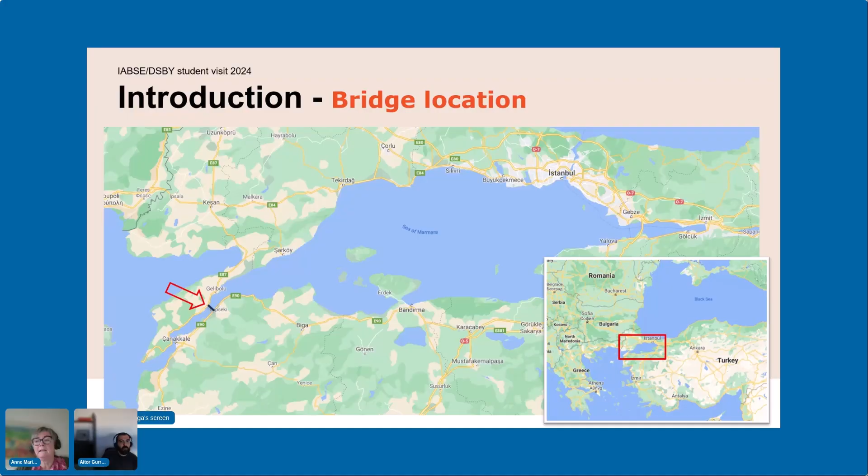More than 40,000 ships pass every year, and in addition to that, the bridge is furthermore located in an area with high seismic activity and with large wind impacts from the Aegean Sea. So there have been a lot of challenges in the design. Next, please.

Here are some numbers for the bridge. The bridge has a main span of 2,023 meters, which is not only the longest span in the world, but also the 100 years anniversary for the Republic of Turkey. There is a lot of symbolism in the bridge, as it is the location for a battle that took place in the First World War in the year of 1915, which also is a part of the name of the bridge.

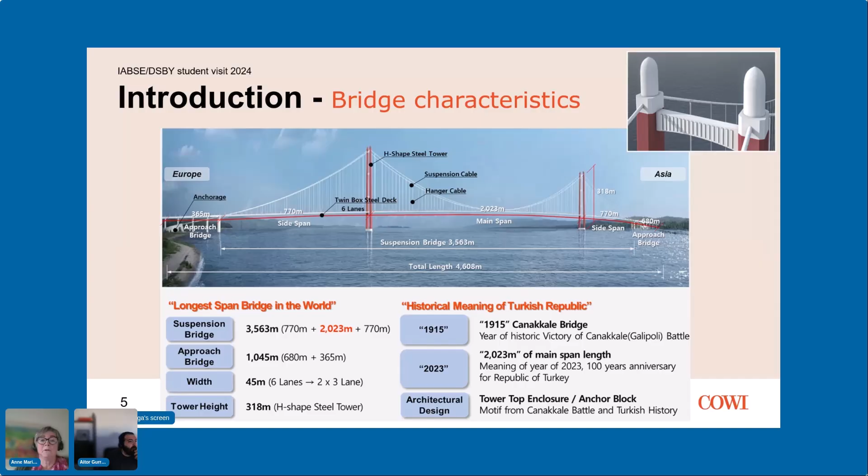The towers are 318 meters high, which also is a date for the victorious battle that was on the 18th of March. The main cable, the suspension cable, has a diameter of 870 millimeters with 144 strands, and the highest point of the deck is at level 86 meters. Next, please.

Our client was the consortium DLSY, which consists of contractors from both Turkey and South Korea. And our scope was the detailed design together with a consultant from South Korea called PEC. There were no requirements for 3D models or any other information rather than drawings and bar bending schedules. The drawings were supposed to be submitted in PDF and AutoCAD format. For the structures we did in Tekla, they got IFC files per request, but it was for information only.

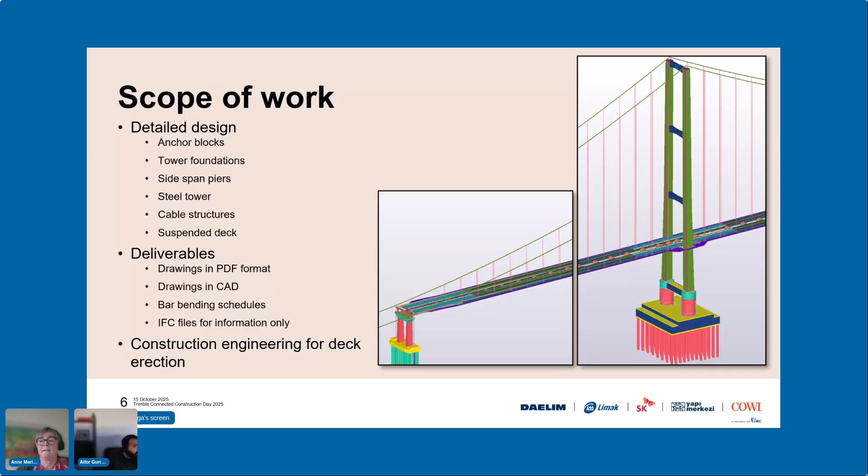After the design was completed, COWI got the contract for construction engineering for the deck erection, and it was a huge benefit that we had the 3D models. Here you can see the different parts we did in Tekla. And as it was one of the first major bridge projects we did in Tekla, we didn't use Tekla for all structures. We did the concrete structures, the anchor block, the sidespan pier, and the tower foundation with full reinforcement as it was necessary for creation of the bar bending schedules.

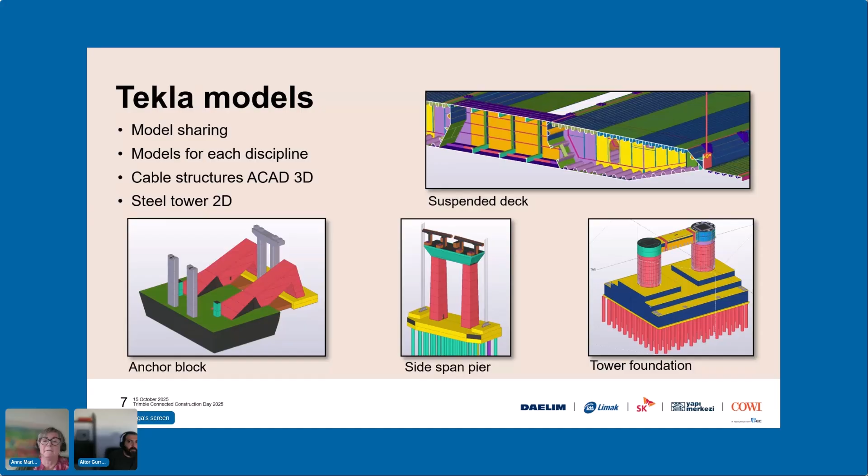And then we did the suspended deck, which you can see on the top, in Tekla, and it is a steel structure. We started out having everything in one model in Tekla Model Sharing, but we decided after some months to split the model into models for each discipline. The reason was that the model became quite heavy, and we were around 20 modelers, and it was a lot of reading in and writing out, especially around submissions. And furthermore, the risk if something went wrong in the model was minimized with having different models. So, next, please.

Now, we will focus most on the suspended deck, as the way we modeled the deck has led to a development project that Aitor will talk about later. The bridge deck is a twin box girder with a cross girder in between, and is 45 meters wide and has 6 traffic lanes. The height of the deck is 3.5 meters.

Everyone might not know exactly how a suspended deck looks, but the deck is divided into segments, typically corresponding to the distance between the hangers, and you can see what is selected in the image. That is a segment on one of the boxes.

The segments are constructed in fabrication yards and then transported to site and erected into place. A deck segment consists of an outer box, including the stiffeners, the longitudinal steel, transverse diaphragms, and a hanger anchorage, and between the two boxes, the cross girder.

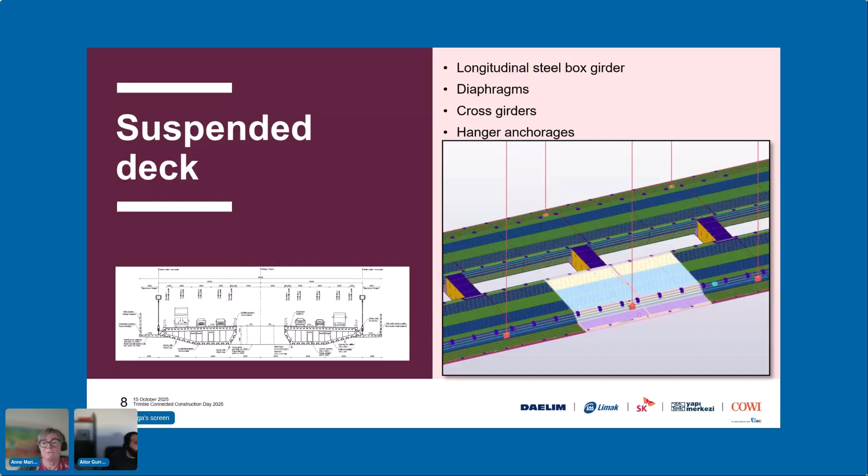So there were some considerations how to do the modeling, and the developer came up with the idea of having dummy beams to control the geometry and setting out. An object based on a parametric profile that represents the geometry of a deck segment, both in transverse and longitudinal direction. Those dummy beams were main parts used to insert the actual objects.

The segments are straight, 24 meters long, and got inserted into the model in the curvature that defines the longitudinal profile of the bridge by start and end coordinates exported from our internal analysis software, IBDAS. This approach has been developed further with a live link between IBDAS and Tekla, so IBDAS inserts the dummy beams.

Throughout the life of the model, the dummy beams continue to be useful, as each face and corner could be used as reference for setting out for further modeling. And you can see the 2D picture with WP1 and WP2, that there are some working points, and that is what is related to the dummy beam.

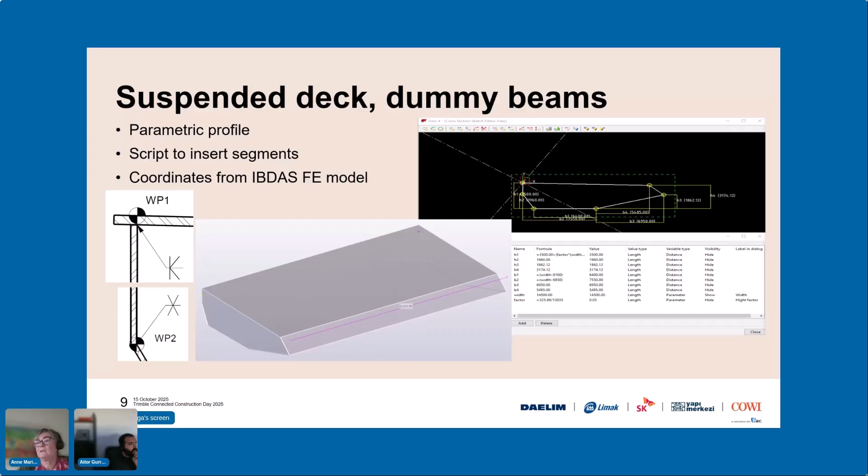Yeah, thank you, Aitor.

All the main parts were prepared as custom components and inserted by utilizing the dummy beams. And you can see it in the video how that is happening by picking the object. This is now a more automated process with Grasshopper scripts and inserted as Grasshopper components, which I also will talk about later. It was taking into account all parameters that varied, so it was possible to update the parts individually.

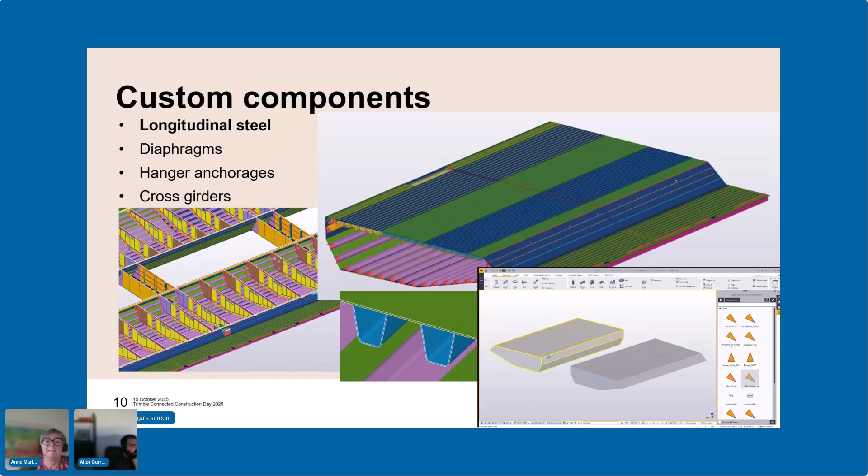Next, please. So here is another component, which is the diaphragms. They vary in types, and we had different components to accommodate for that. Within the component, it was still possible to have individual parameters when needed. The top image is the typical diaphragm, and the lower one is at the cross girders. And in between, there are also different types.

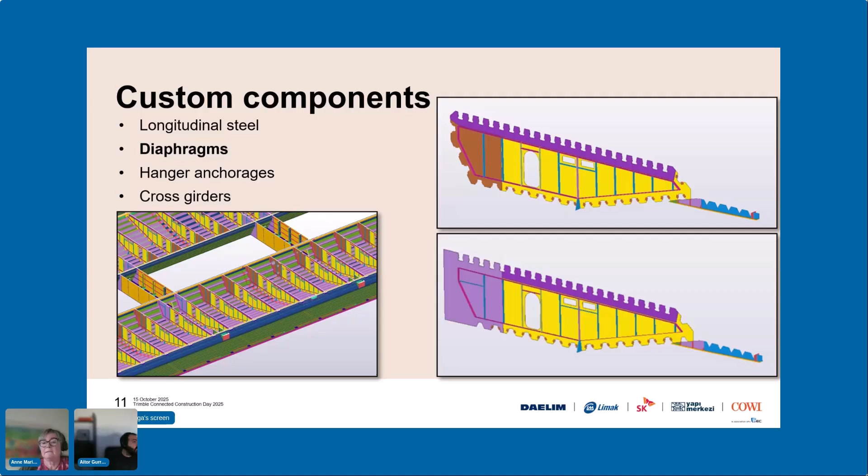It got inserted relative to the insertion points of the dummy beam, and had a variable to define the distance to the location. Typically, there were 6 in a segment. Next, please.

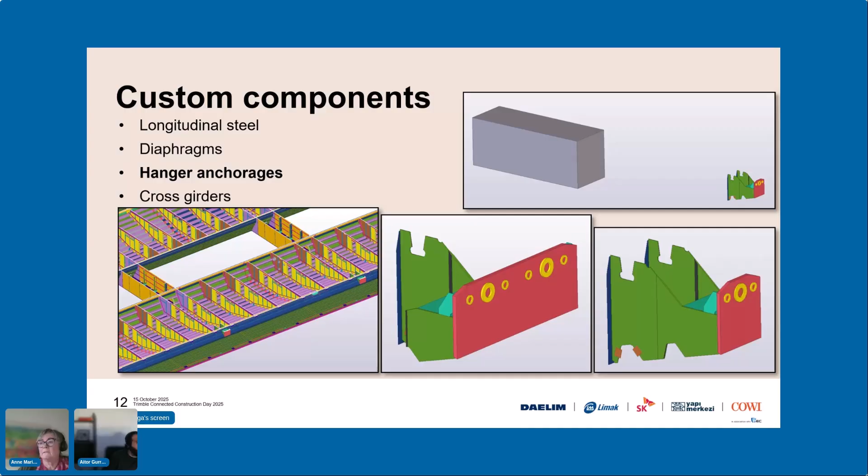The components for the hanger anchorage and the cross-girder followed the same principle. The advantage of having the different parts as components is that you easily can isolate the specific elements that belong to a certain part rather than having individual objects, and it helps also in filtering on the drawings. And here you can see the hanger anchorage, and to the next one, please. There you can see the cross-girder.

Yes, there were some areas where the modeling was done manually because it was unique. There was nothing repetitive in that. It was around the tower, which is the one to the left, and at the bridge end. And here it was very beneficial to have the dummy beams, as corners and faces were used to place the manually modeled objects. Then we were ready to do the drawings. No, please back one, Aitor, still.

For the whole project, we did around 1,700 drawings. There were a few done in 2D outside the Tekla environment, but most were derived from the Tekla models. It went fairly easy after we considered the filtering to avoid seeing too much on the drawings and having double lines. Now we can switch.

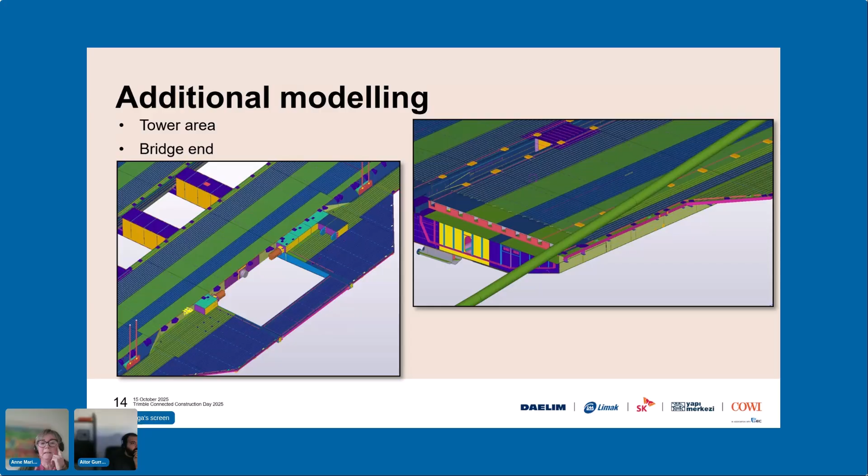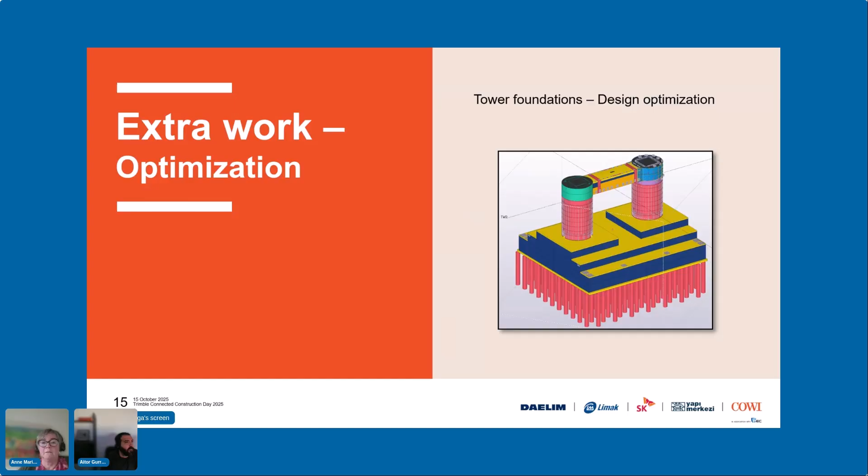After the design of the tower foundations was completed, we got a request for an optimization that could speed up the construction and reduce the amount of offshore works. Next, please. In brief terms, the process for the tower foundations is that most is cast in the docks, filled with water, towed to site, and then immersed into place to be finalized on the bridge location.

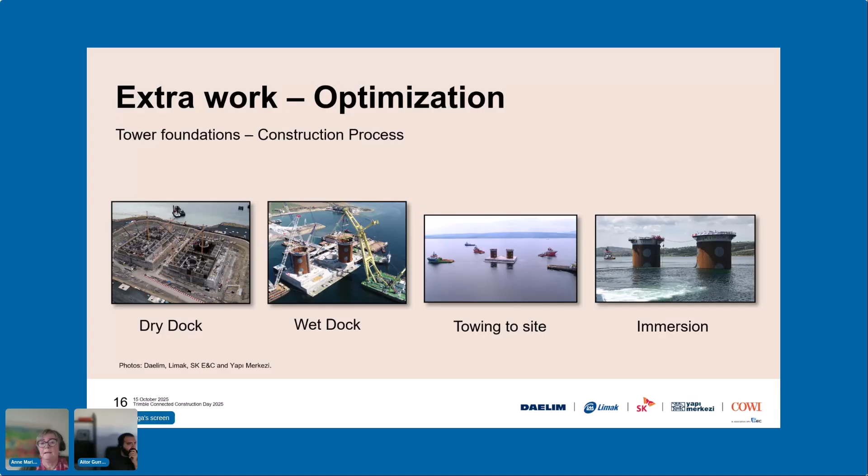Instead of having formwork and reinforcement in situ at the bridge location, a solution based on prefabricated cages containing all formwork and reinforcement was introduced. Next, please. The tower leg is composite with steel skin plates, and on the right picture, you can see the cages with the reinforcement.

And the tower leg is composite with steel skin plates and concrete cast between, which you can see on the upper left image. And the leg has a diameter of 18 meters. As you might also see on the images, it is rather congested, and the reinforcement from the cages should fit into the tower leg, where there were a lot of shear connectors, and it was a struggle to make the reinforcement fit.

We didn't have much time to do this, so design, analysis, and modeling were done at the same time, and in close collaboration with the contractor, of course, who followed it very carefully. So we immediately were able to adjust the design if needed. Luckily, it all went well, and it would have been hard to achieve if we didn't have the models.

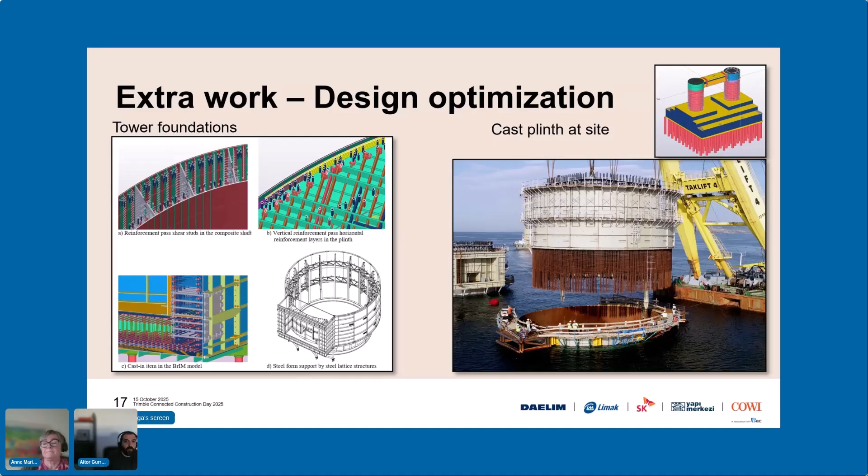It was a fast track, and again, it was very useful to have the 3D models.

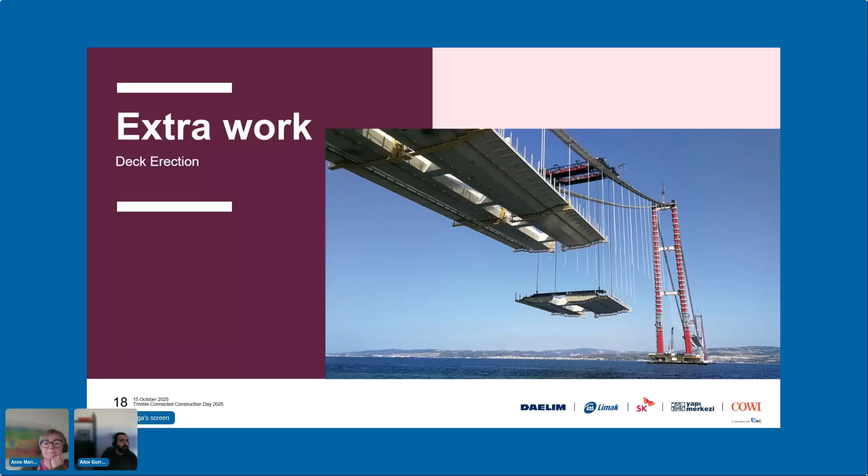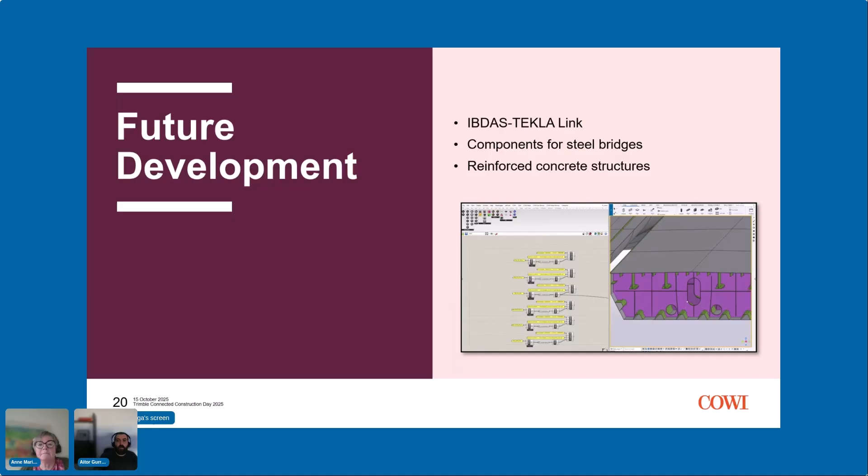Okay, so future development. So now the bridge is built and we need to look for the next steps. So what are we going to do if we need to do another Çanakkale or similar kind of bridge? So we started to think on some development in that regard. So with the Tekla link, we looked at how we can connect our internal analysis software with Tekla.

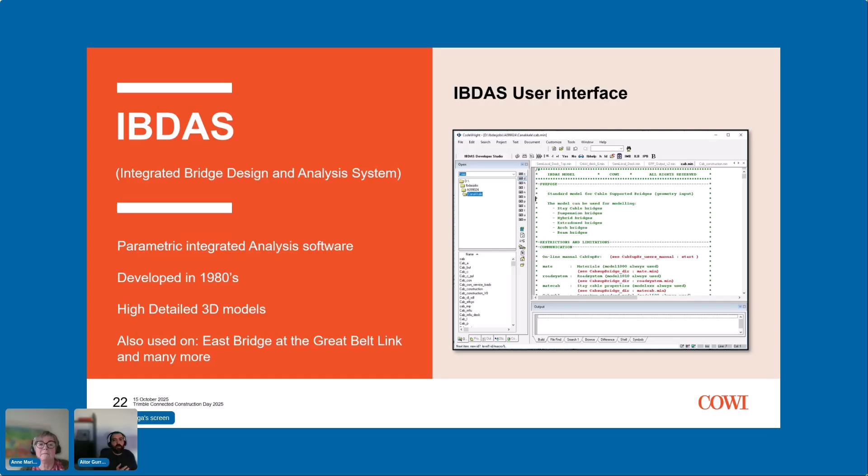So before I talk about the link, a quick look on IBDAS. It's our parametric analysis software developed by COWI in the 80s, and provides us high detail 3D models, and it was used at the East Bridge at the Great Belt link, and a lot of different projects, but this one is quite famous in Denmark.

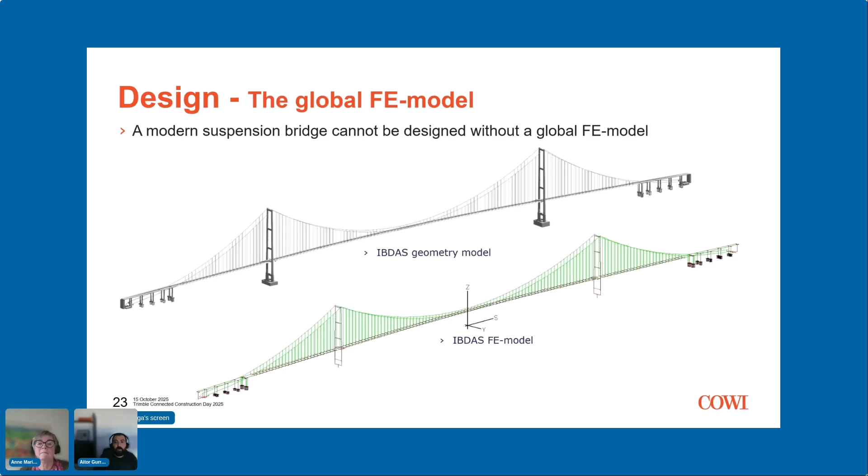These are some of the type of models that we can create with IBDAS. The one in the bottom is for analysis and calculations, but the most important one for us is the one on the top, and is the geometry model that we want to transfer to Tekla.

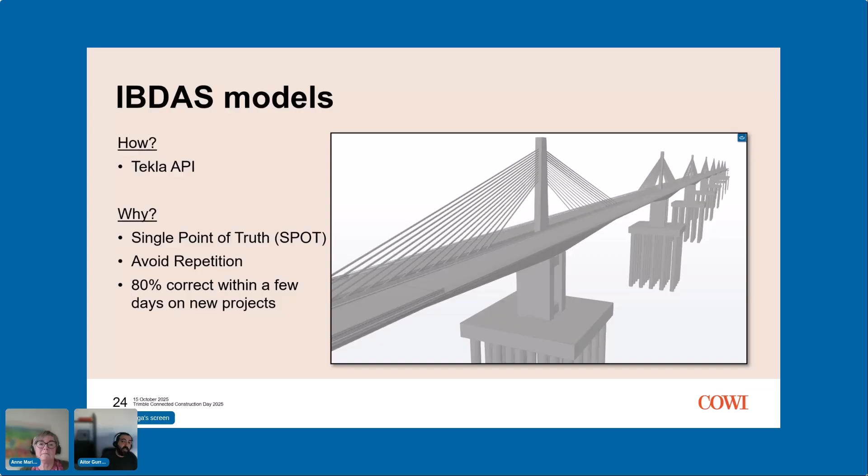So we managed to get the link between IBDAS and Tekla in place. How? Through the Tekla API, we asked our IBDAS development team to code and develop the integration. And why? We saw the benefit to have a single point of truth, that we call a SPOT, as the geometry and the analysis were both connected and coming from IBDAS. And that will always help us to avoid repetition, because we don't need to model in Tekla what is already done in our analysis software.

So with the link working and in place, we started to think in our new workflow. We will have a single point of truth with the design information. It will go into IBDAS, and then the geometry model will be exported into Tekla. And we will use Grasshopper to generate the different structural elements.

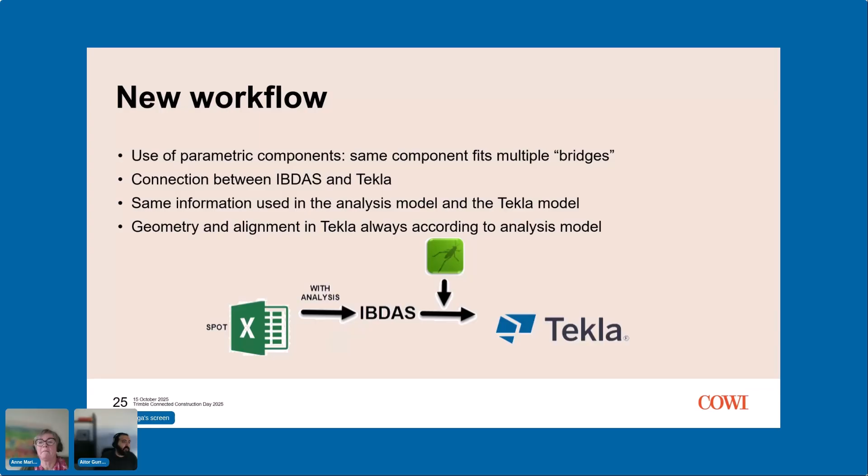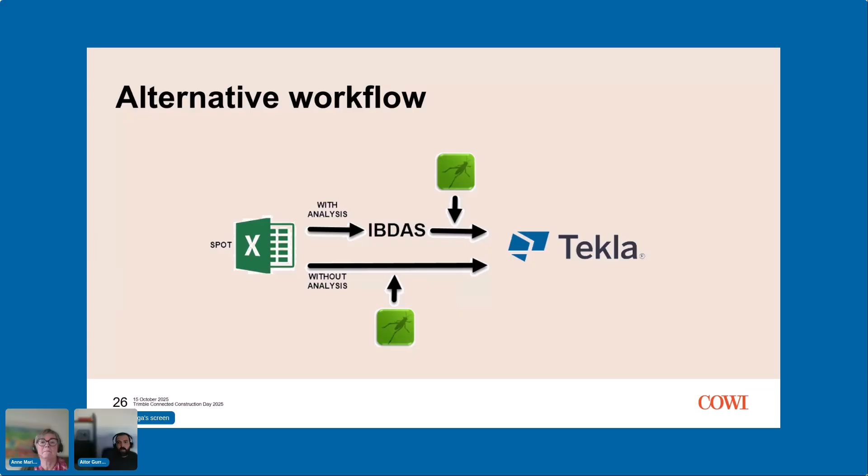The beauty of the workflow is that it can be used without IBDAS if it's not a requirement. It can be used with IBDAS and other different analysis softwares as well. So at the end of the session, I will show you other structure types that can use the same workflow, but now we will focus on the deck.

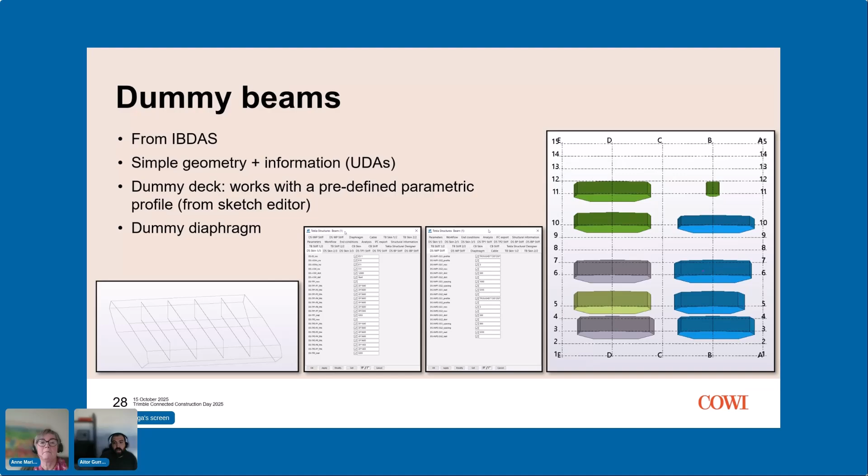So similar to what Marie described before, we will export from IBDAS some elements into Tekla. We will call these elements dummy beams. They are information containers that will define the geometry and provide all the information needed to model the steel plates. These dummy beams are native elements in Tekla, such as beams with a parametric profile defined in the sketch editor.

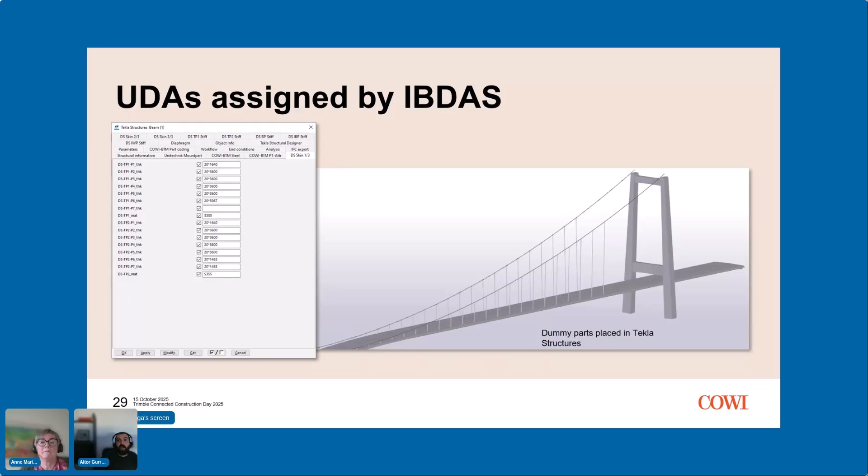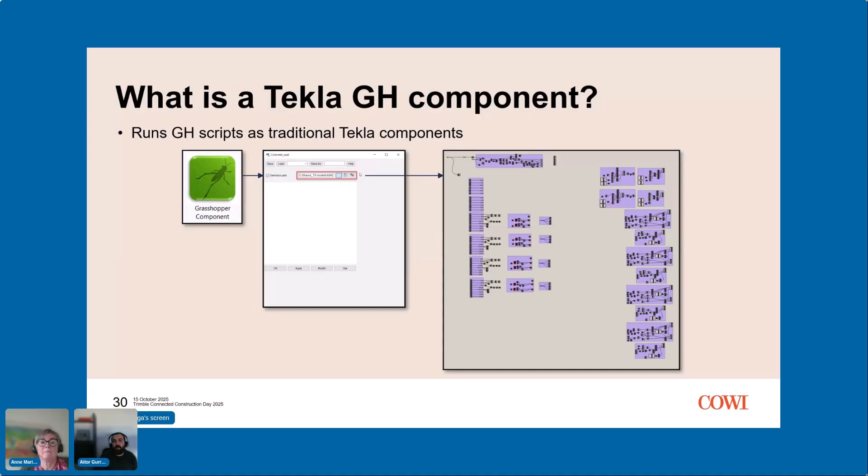This is just an example of a bridge that is exported from IBDAS into Tekla, and then on the left you can see the UDAs also coming from the design input. So after the dummy beams are in place, we will run a Grasshopper script that reads the UDAs and creates the plates. In this case, we will not run Grasshopper directly. We will use Grasshopper components, as it allows us to run the script without being an expert in Grasshopper.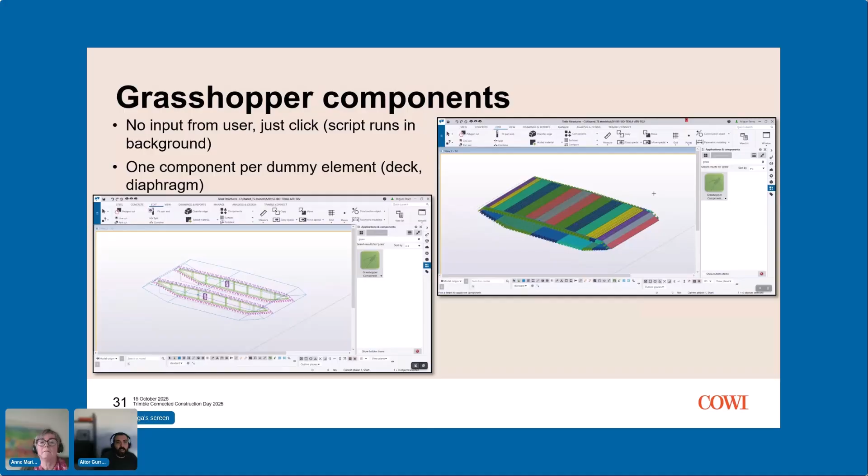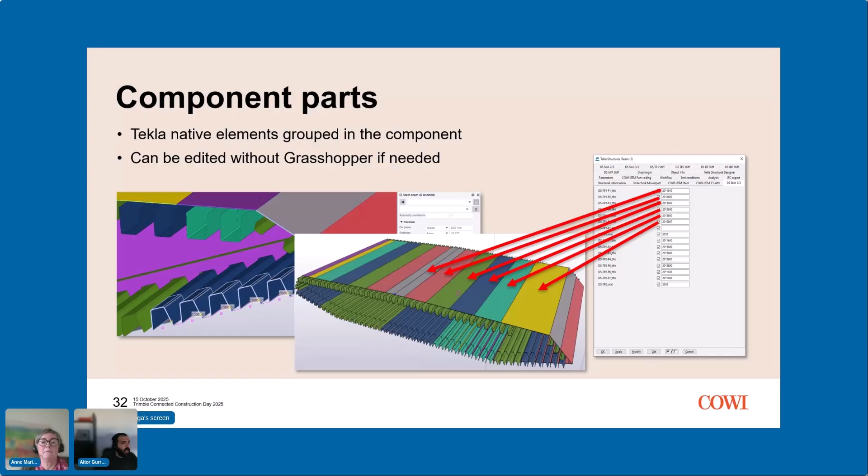So one great advantage of the development is that the elements generated are, as we said before, steel plates. So they are native elements in Tekla, giving us the opportunity to edit them manually in case we don't need Grasshopper. So on the pictures, we are trying to show which UDA is inside of all the elements that are created. This is just a quick diagram of the workflow.

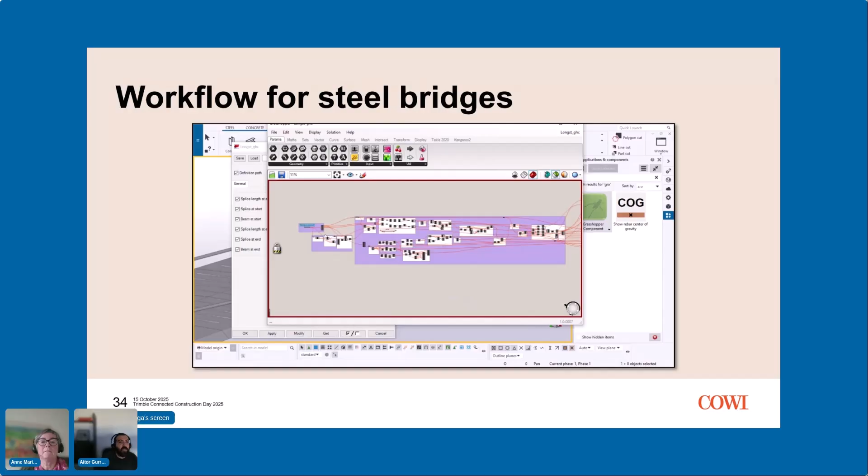And this video is a demonstration of the workflow itself. So the Tekla user only needs to open the Grasshopper component application and run the Grasshopper script. You can visualize it if it's needed, but you don't need to be an expert in Grasshopper to use the component. This is just in case you want to check what the Grasshopper script is doing.

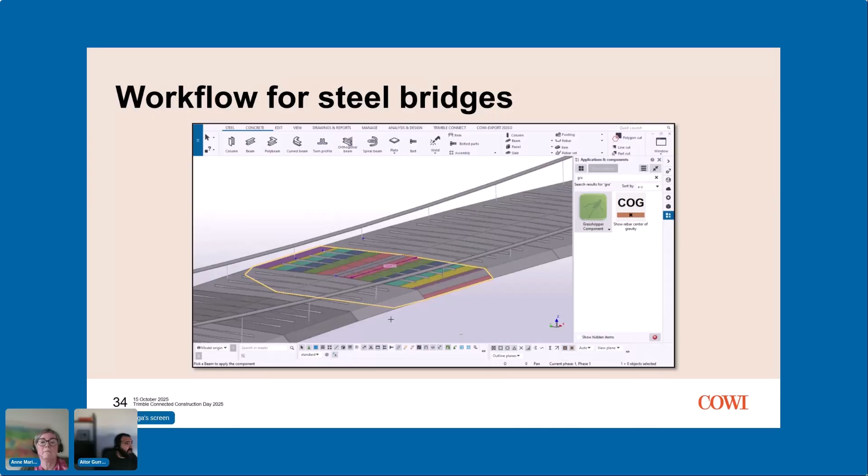So as you can see, after a few clicks, we just select the component, we select the dummy beam, and then the rest of the elements, the different plates, are modeled in Tekla. Now we are cleaning up a little bit, but here it is, the result.

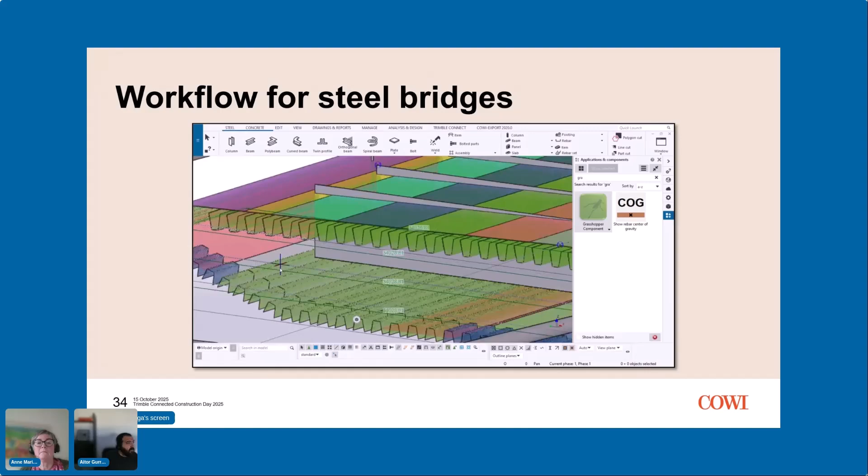So these are other structures that we think the workflow can be implemented in, and we hope in the future to use it. So not only for the deck and the diaphragms, but also the cross girder and the tower segments.

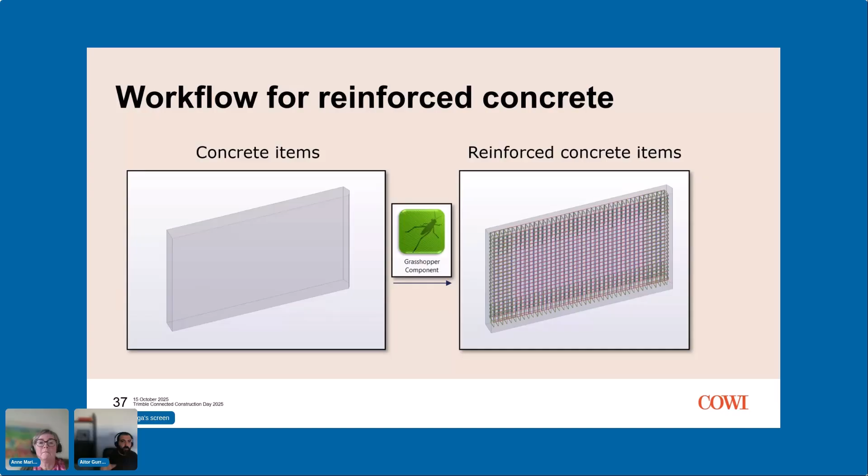So now I'm going to talk about the workflow for reinforced concrete. As you can see on this diagram, we apply the same principle as with the steel. So we use the Grasshopper components.

The biggest difference in this reinforced concrete workflow is that they are exported directly from IBDAS as a concrete item. So they are not dummy beams. It's the final geometry imported in Tekla, as I said before, as a concrete item.

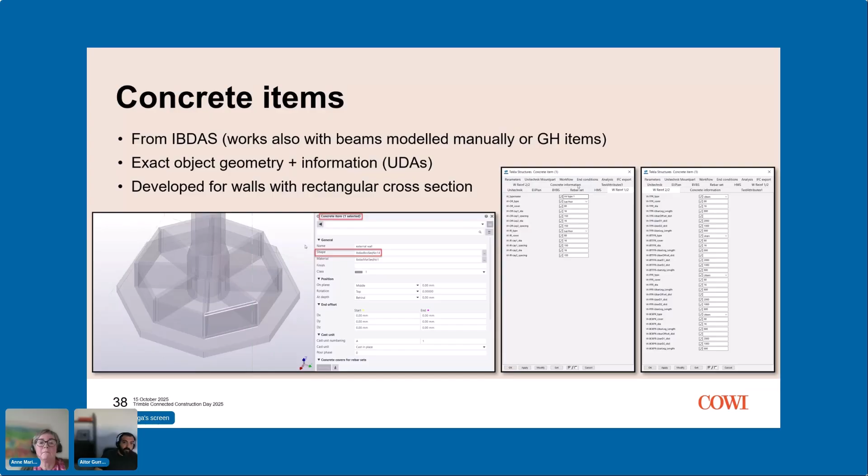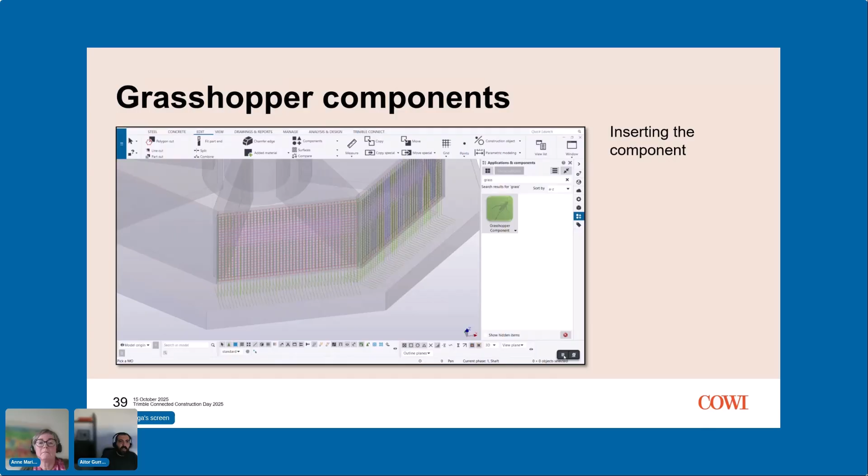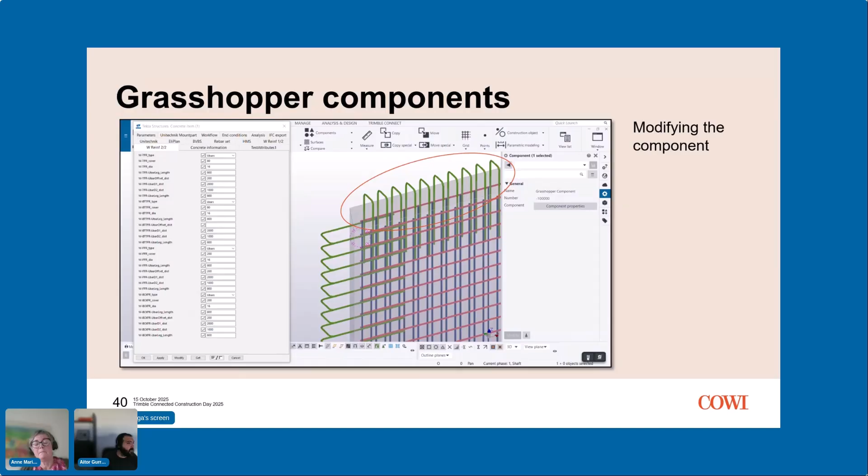I see we don't have any questions right now for the session, so everything was clear and professional. I'll just wait 1 minute in case a question pops up. Otherwise, okay. No. Okay. No, there was a question, but it's something else, no? Yeah, well, yeah. Okay, now I have a question. I can read it for you.

What value do you see of using components instead of pure GH? Or Grasshopper? Pure Grasshopper? Yeah. And Marie, you... Yeah, I think it's very nice that, if you take the box girder we showed before, when you do the design, it's also based on different parts of the segment. So you have the longitudinal steel or you have the diaphragm,

and then I think it's very nice that we can isolate that by having the Grasshopper components, because maybe you need to submit information, attributes, or other information, and that is related to certain parts of the bridge. So it's an easy and nice way to isolate things. Mm-hmm. It's one of them.